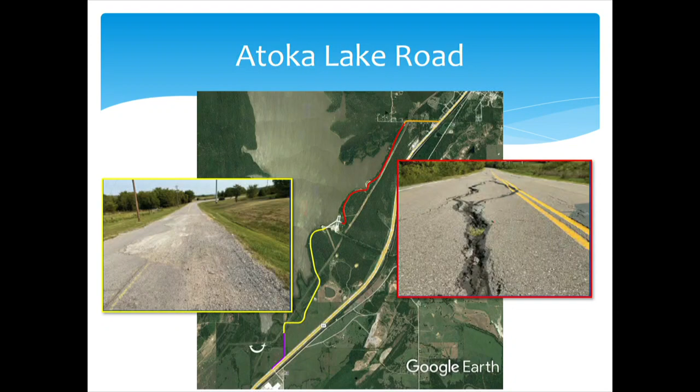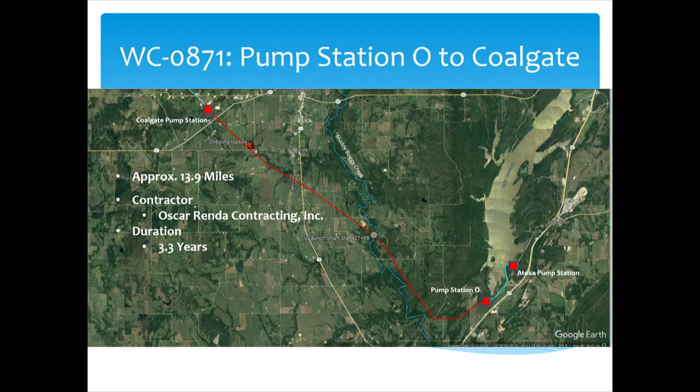Going up and down the Atoka pipeline, the segment between Pump Station O and the Coalgate Pump Station is being done by Oscar Renda Contracting, for about 3.3 years. Currently they're doing clearing and grubbing activities up and down the pipeline, and also getting set up to tunnel under Muddy Boggy Creek—similar to another project I'll talk about later, but not to that extent.

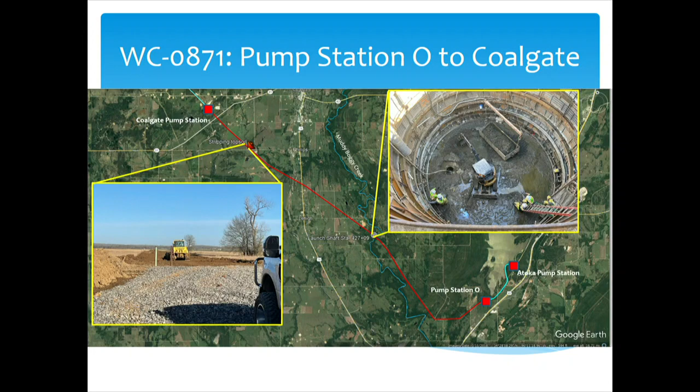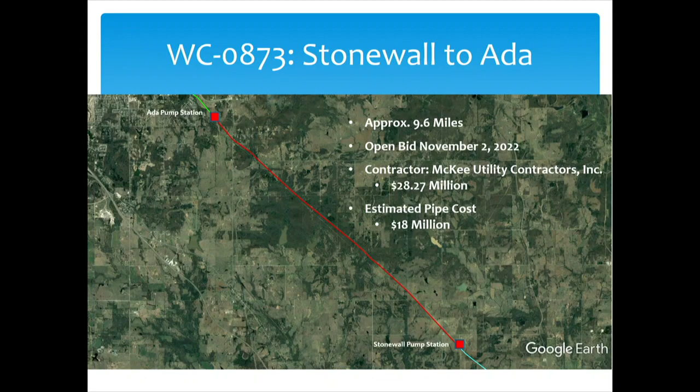From Stonewall to Ada, it's approximately a 9.63-mile-long pipeline that we opened bid on last November. We have McKee Utility Contractors winning it for $28.27 million, with an estimated pipe cost for this stretch around $18 million. They've started clearing and grubbing activities, and the area in yellow is as far as they've gotten so far.

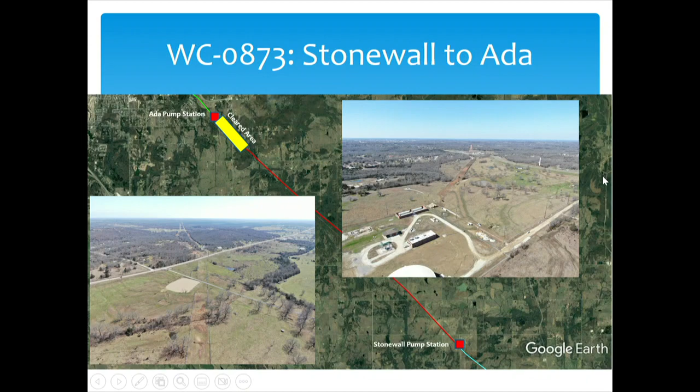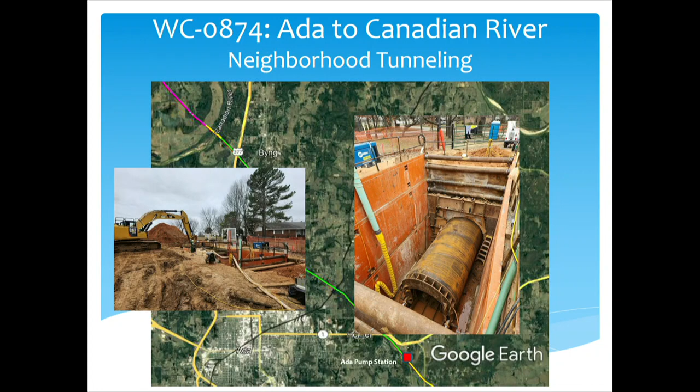Ada to the Canadian River—along that stretch of pipeline we're going through some neighborhoods and doing some tunneling underneath roads so that we don't cut off access to people's homes and neighborhoods. So that's going on as well.

Also along the tunneling front, we're going underneath Highway 377, or Highway 99, there around Byng, Oklahoma. We have casing pipe that was already installed back around 2010, so all they have to do is push the pipe through that casing underneath the highway. I've also got news that they've completed tunneling underneath Highway 1, just northwest of the Ada pump station.

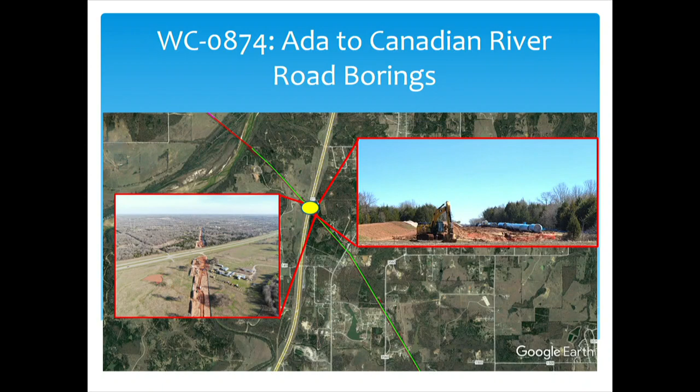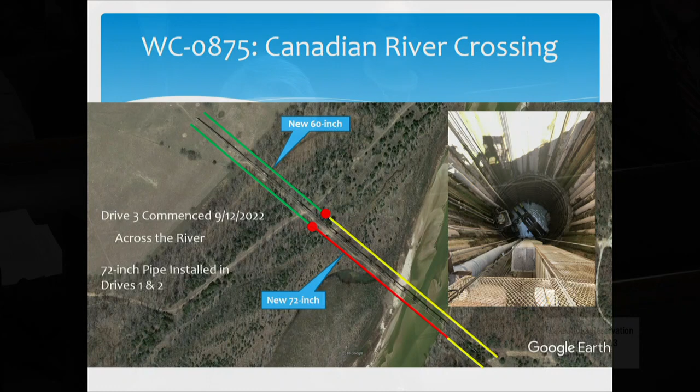The Canadian River crossing is the one I was referring to earlier, where we're boring underneath the Canadian River. We have 4 drives, or tunnels. Drive 1 and Drive 2, shown in green, have been completed—the tunneling is done and the carrier pipe installed and welded up. Drive 3, the 72-inch tunnel shown in red, we've gotten completely underneath the river and are now under the other side of the riverbank. We have not started work yet on Drive 4, the 60-inch tunnel.

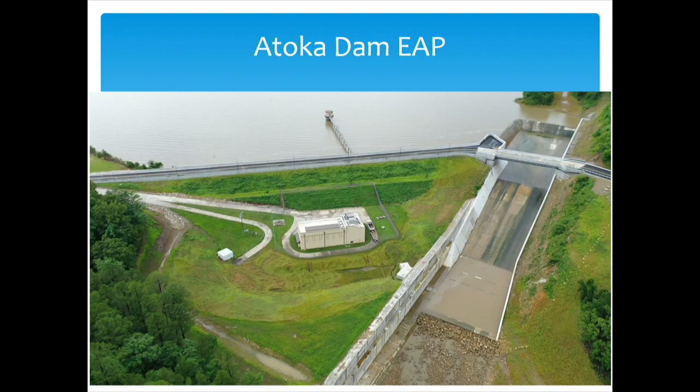Any questions from anyone? Mark? Yeah. That's all I have. Okay. Any questions? Thank you. Thank you. That's all I have, Mr. Mayor. Thanks, sir. Let's move down.